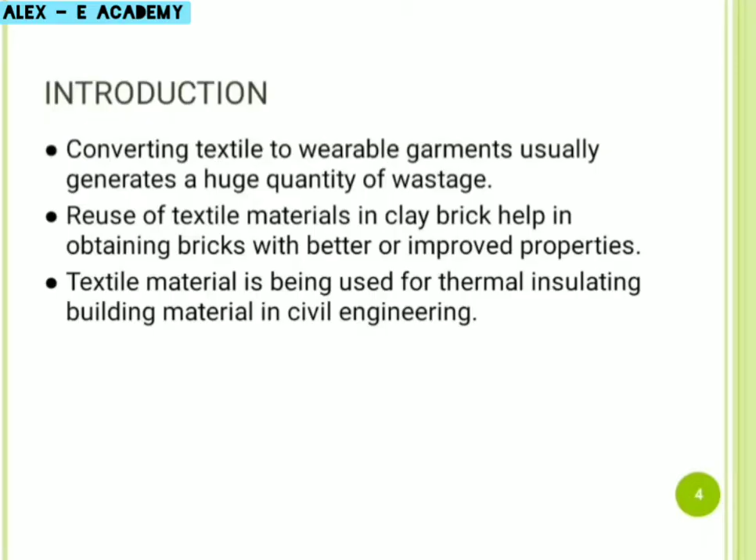Future scope: this reduces pressure on virgin resources, saves energy, and reduces pollution.

Objectives. Clay brick in its form of sun-dried and burnt has been around since the beginning of civilization, 10,000 years ago. It was easily produced, lighter than stone, and easy to mold, forming a wall that was fire resistant and durable, with low cost, lightweight, and sustainable construction material in the building industry.

Literature review. First, utilization of textile apparel waste in clay brick by S.K. Agarval. In this paper, he explained the physical and mechanical properties of bricks investigated.

Second, recycled fibers, an overview by Dinesh Bhatia. In this paper, he explained the manufacturing of bricks with low cost construction.

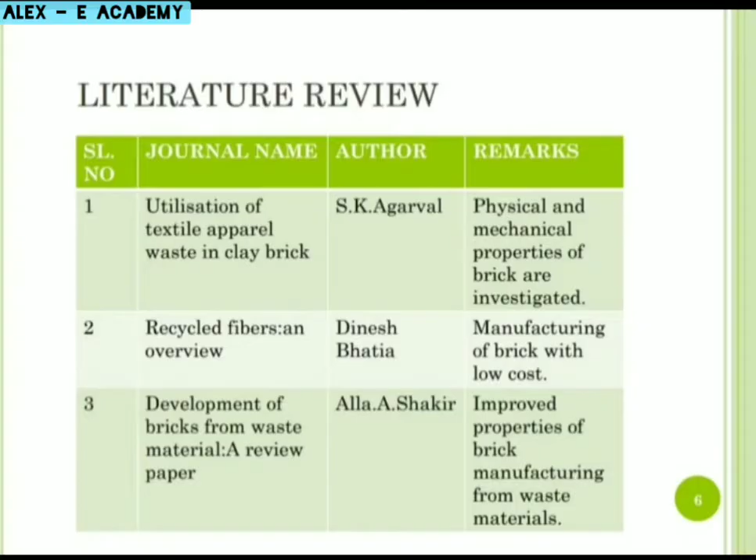Third, development of bricks from waste material, a review paper by Alla A. Shakir. She explained the improved properties of bricks manufactured from waste materials.

Fourth, utilization of textile mill waste sludge in burnt clay bricks by Shrikant S. Jahagirdar. This covers the utilization of textile mill sludge in clay bricks.

Fifth, characterization and reuse of textile effluent treatment plant waste sludge in clay bricks by R. Baskar. He explained the systematic investigation about the partial replacement of clay by textile industry waste.

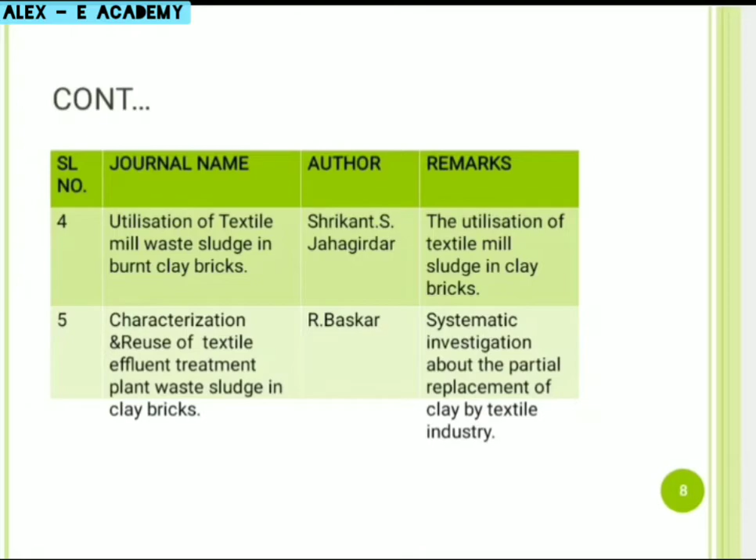Materials. The materials used for clay bricks are alumina 20 to 30% by weight, silica 50 to 60% by weight, lime 2 to 5%, iron oxide less than or equal to 7%, and magnesia less than 1% by weight.

Why this topic? It is to reduce the pollution caused by non-biodegradable textile waste, and to produce bricks that are durable, reusable, free from contaminants, and naturally resistant to pests or fire. Clay brick is safe to live in, making it the ultimate material in responsible and economical home building design. They are one of the very few materials that can be reused with all their original qualities intact.

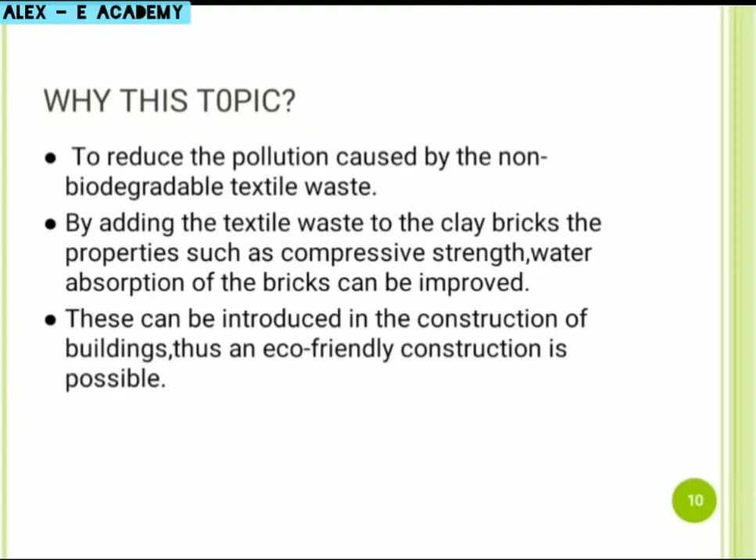Tests to be performed: Compression test. Bricks are mostly subjected to compression and rarely to tension. The usual crushing strength of common hand-molded well-burnt brick is about 5 to 10 Newton per mm square.

The compressive strength of brick is 4.6. This is the machine used to compress the material, as per the requirement.

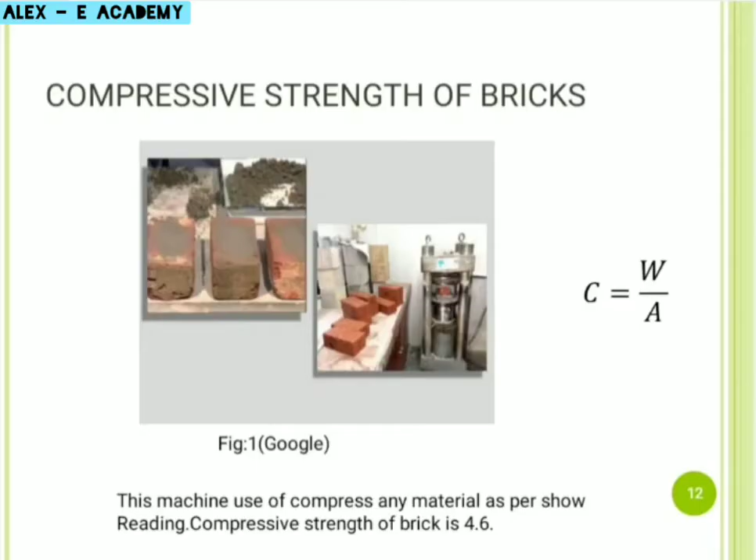Second is water absorption of bricks. Brick for external use must be capable of preventing rainwater from passing through them to the inside of the wall, with reasonable thickness. Water absorption of clay brick is 30%.

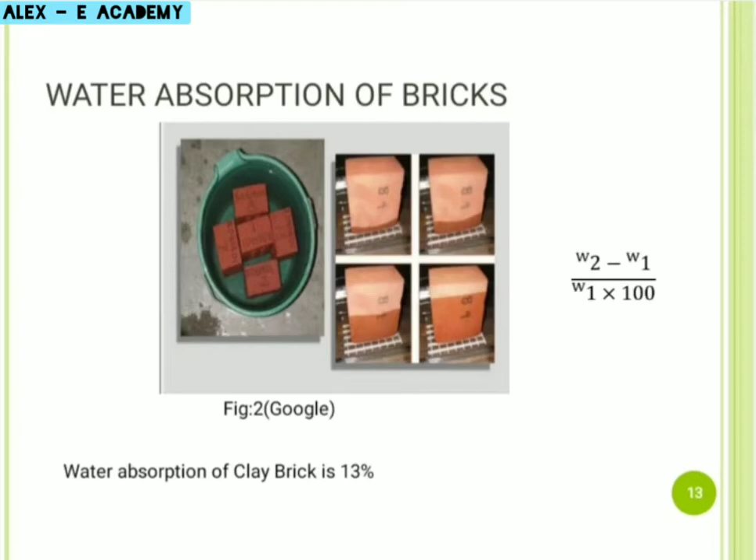Efflorescence test. Sodium and potassium salts present in bricks get dissolved in the absorbed water, and when evaporation takes place, the concentration of salt increases until a point is reached when salt crystallizes out. This point largely depends on the capillary properties of the material. It can be defined as a crystalline deposit of soluble salts, generally white in color, that appears on the surface of the clay brick.

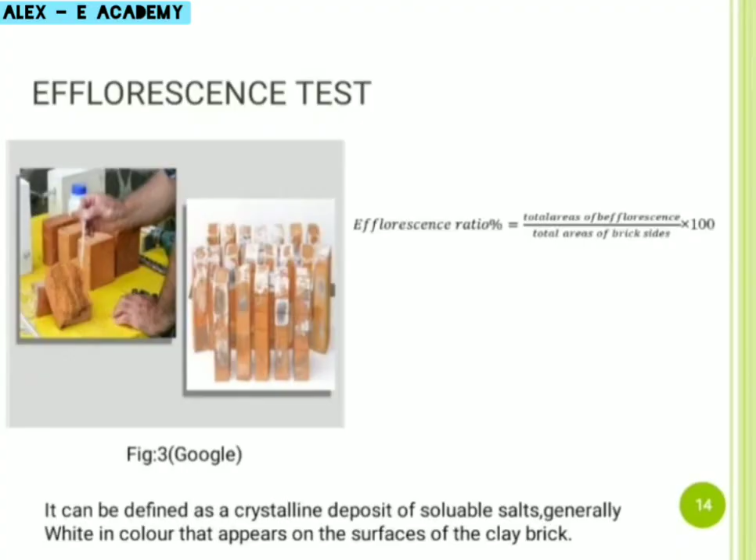Methodology: collection of materials, manufacturing of bricks, test on clay bricks, analysis of result, report making.

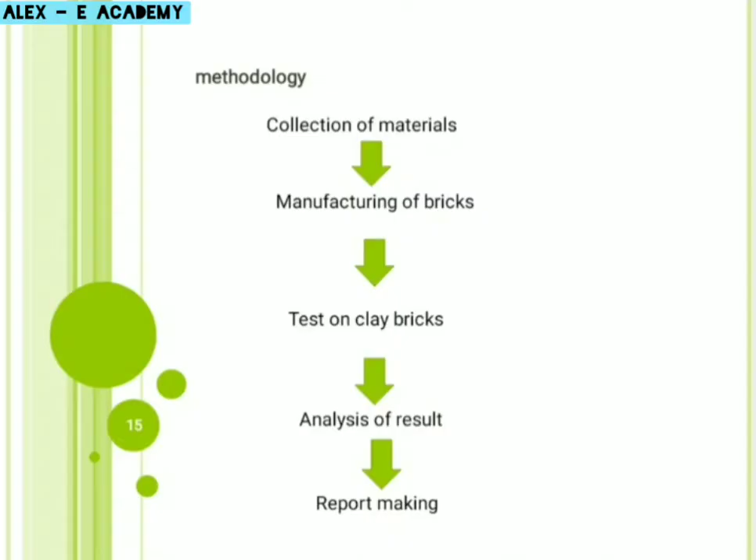Manufacturing: preparation of clay. Digging - after removal of the top layer, the clay is dug out from the ground and spread on plain ground. Cleaning - in this stage, the clay is cleaned of stones and vegetable matter.

Molding of bricks. Molding is a process where the prepared clay is placed in a mold which forms it into the shape of a brick. There are two methods of hand molding bricks: slop molding and sand molding method.

Drying of bricks. After the molding process, the bricks contain some amount of moisture. Drying is to be done, otherwise they may crack while burning. The period of drying may be 3 to 10 days.

Burning of bricks. This is brick that has been treated in a kiln at an elevated temperature to harden it, give it mechanical strength, and improve its resistance to moisture.

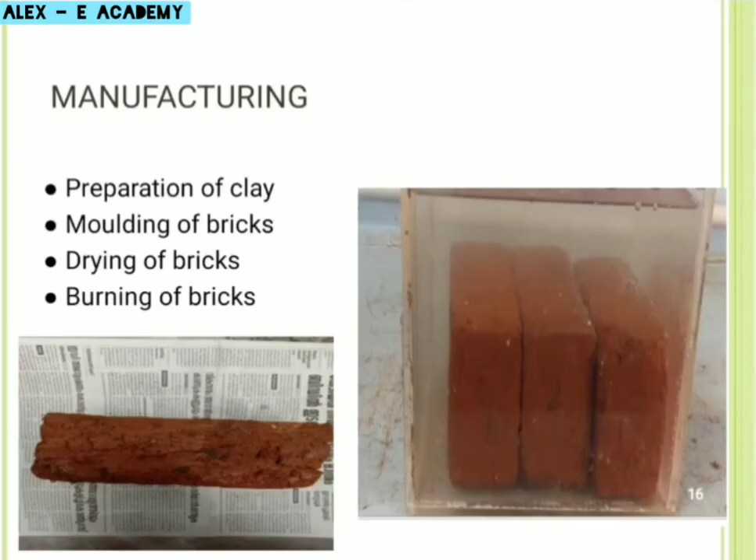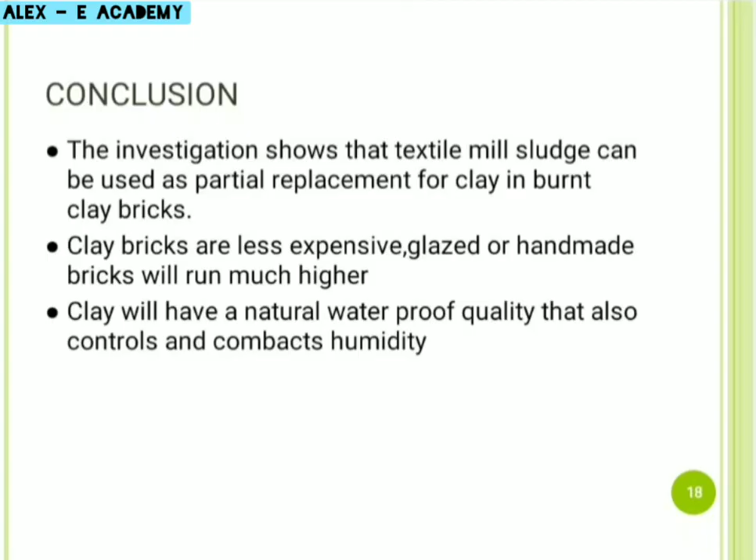Conclusion: the investigation shows that textile mill sludge can be used as a partial replacement for clay in burnt clay bricks. Clay bricks are less expensive; glazed or handmade bricks will run much higher. Clay has a natural waterproof quality that also controls and combats humidity.